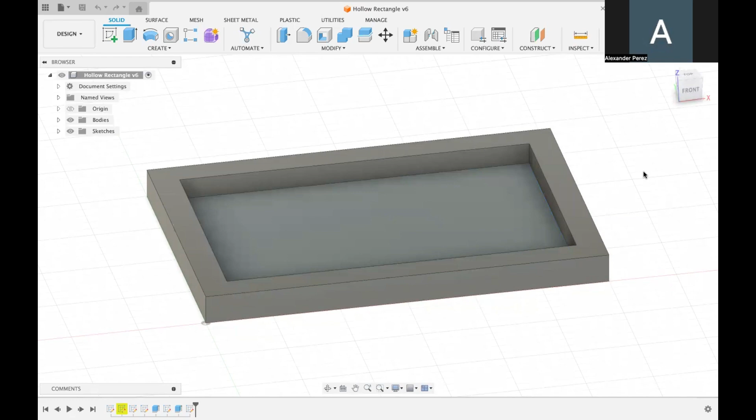Okay, and now that we are in Fusion360, I'm obviously not going to be teaching you how to make a CAD model. However, I hope you have a coherent file that you can use to follow along with this tutorial. In my case, I already have a pre-made model that is relatively simple. It's just a hollowed out epoxy rectangle, which I will be using the CAM software to set the toolpath to mill out all of this stock.

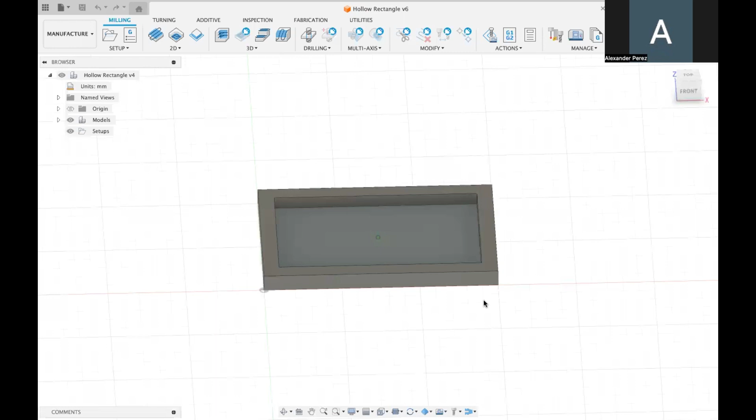So now we can switch over to the CAM section of Fusion360, where essentially we're going to be setting the instructions for the machine, as well as the direction of the material on the bed of the machine, and the direction of the end mill.

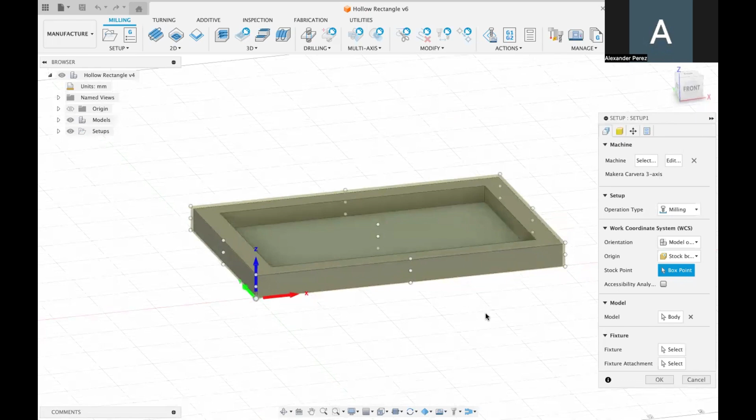So first, we're going to be going to the setup, as obviously we can't have a G-code without setting up some sort of base for things such as the tool orientation origin, where we're going to be telling the machine where the X, Y, and Z of our stock is. You can put this on the top left or bottom left of your stock. I preferably like to do it on the bottom left. I just think it looks cleaner, but it's all up to your preference.

And as for the machine, if you're using the carbide, you're going to just select no machine, and later in the exporting process, there will be special settings for that. But if you are using the Carvera machine, you will just select the Carvera after importing the files from the Makera website onto your computer. And as for the WCS, we just sort of leave that as is. The stock should be relatively the same, and all of that should be left as is.

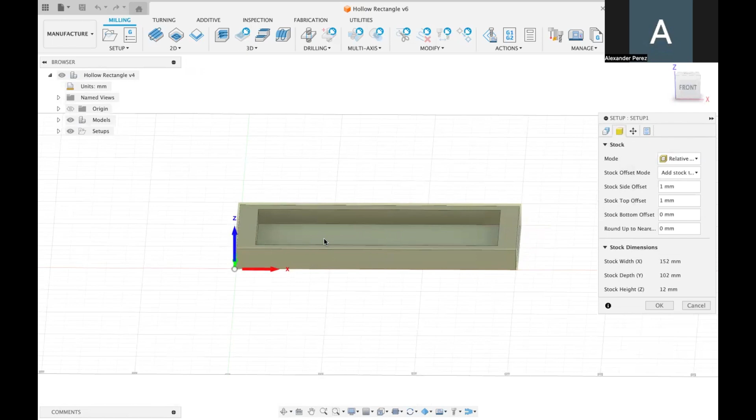For the stock, this is really depending on your CAD. In my scenario, the model I have is already set to the exact size of the stock I have in real life that came with the Carvera machine. So we can just set this to 0. However, if you are going to be using a CAD model that isn't set to the exact size of your stock, which typically it isn't, you're going to want to do fixed size box in these settings here, and then set the X, Y, and Z to the exact diameter of your stock. But yeah, like I said, in my scenario, we're just going to be setting that to 0.

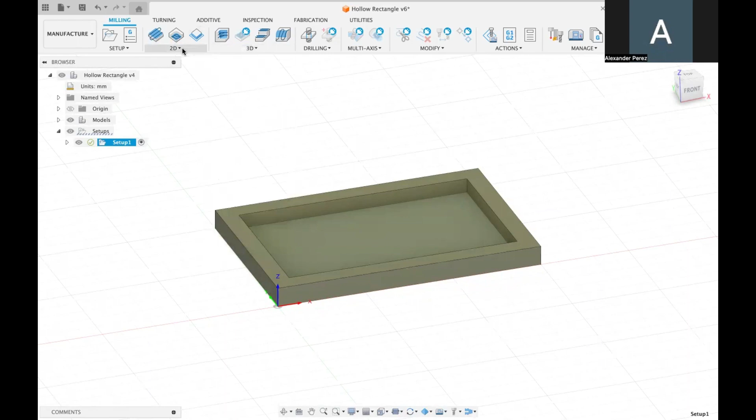And as for the part position and post process, you can leave this as is. It really isn't worth the trouble to mess with it, and it's all stuff that is very finicky and very situational. So now that we're done with our setup, we can move on to the actual toolpath. And as you can see here, there's a 2D and 3D option. In this case, we're going to be doing the 3D.

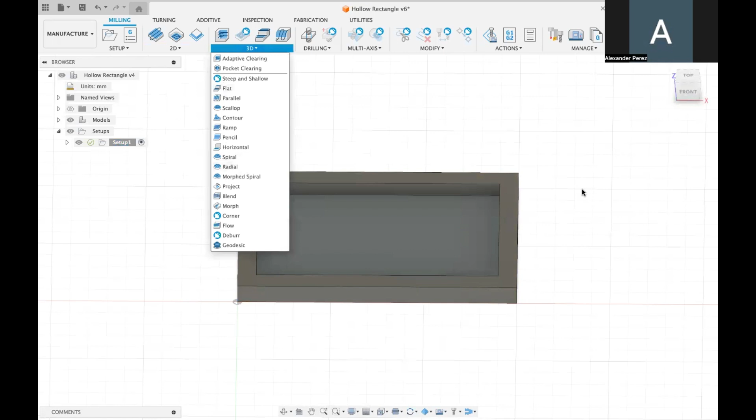However, the 2D is also very useful in a lot of other projects where there are different niche presets such as threading, engraving, and slotting. So very useful things, but we're not going to be using that today. Here in the 3D tab, you can see there are a lot of preset toolpath settings, such as contouring, spiral, radial, different things that utilize the 3-axis machining. So very useful if you are going to be doing different organic surfaces, such as curves.

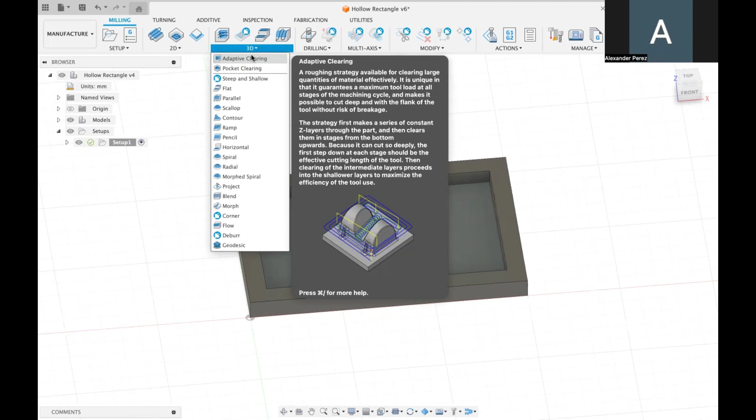But in this case, we're just going to be doing pocket clearing, as we're going to be focusing on just removing large amounts of stock without having too many different movements. Adaptive clearing is also very relevant, but pocket clearing is typically used more for just removing stock, while adaptive clearing is used for removing stock while also having different obstacles in its way. So just sort of a more complex version of pocket clearing.

And now that we've selected that, we have all of these different fun terms here. While it may look complicated, most of these things for the feeds and speeds, you can look up online. I will have a link in the description of this video showing different presets for the feeds and speeds based on the tool bits you're using, as well as the stock material.

So all those things can have a factor in the efficiency of your toolpath. Doing the right feeds and speeds can help you create a more perfected toolpath. However, most of the preset feeds and speeds will be pretty efficient, and you will not have to mess with them too much.

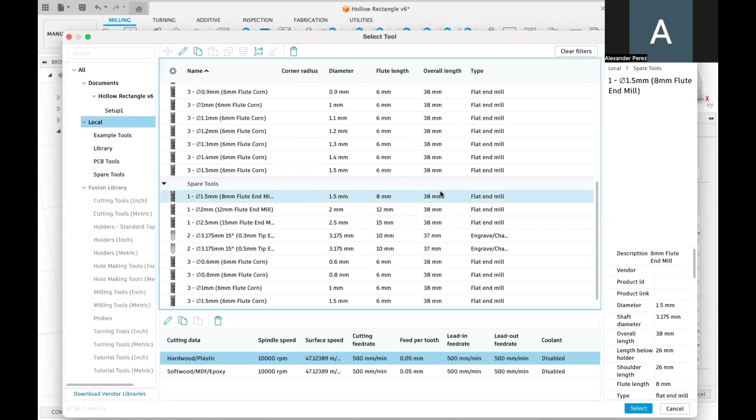As for the tool we're going to use, this is very situational, and I will have a separate video explaining all of the different end mills and what they do and when you should use them. In this scenario, I imported the tool files from the Makera website, which I will link in the description. I'm just going to be using a 1.5 millimeter diameter, 8 millimeter flute, flat end mill. So we can select that and put that in here.

Now that is there, we can have the preset for our stock material. In this case, like I said, I'm using epoxy, but if you're using a hardwood or a plastic or a different material, you can set those accordingly.

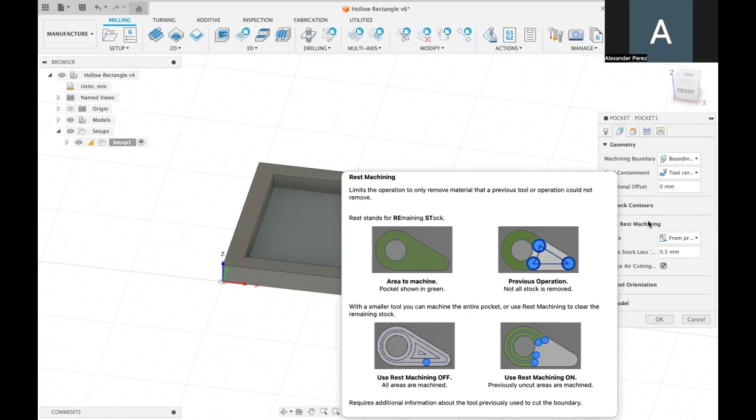Now that we've selected that, we can move on to geometry, which is pretty simple. Rest machining is essentially going to be setting the area of the stock that wasn't previously machined by another operation. So if you have more than one operation, you should be using rest machining. But if it is just going to be one big operation such as this one, you can just set it as off.

And for the bounding, the machining boundary, it should be set to bounding box. And if it's not, please select that.

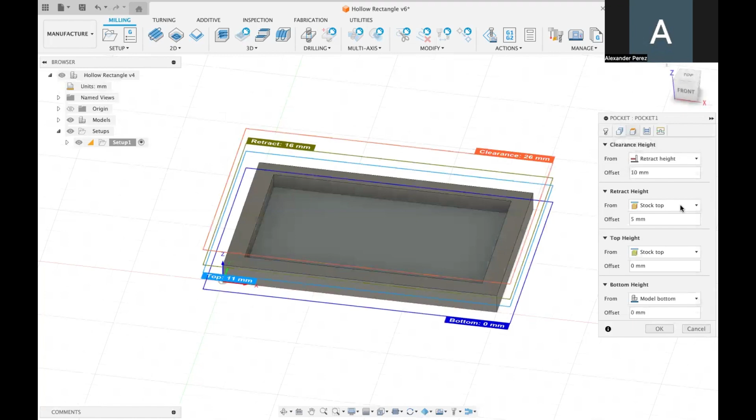As for the heights, this is essentially where the spindle goes to every single time it goes up. And here we have our heights where we can see there's the clearance, retract, top, and bottom heights.

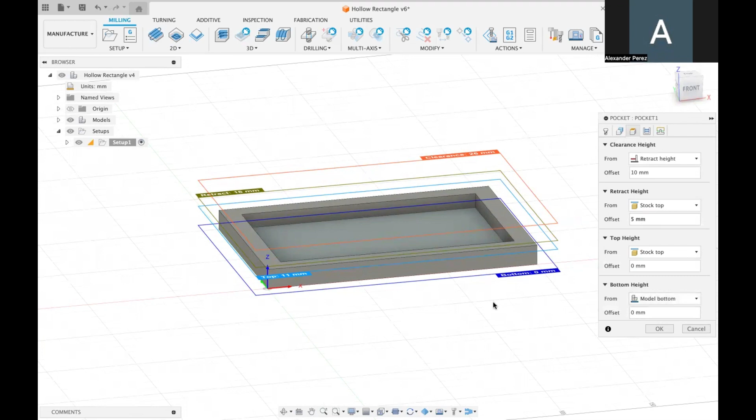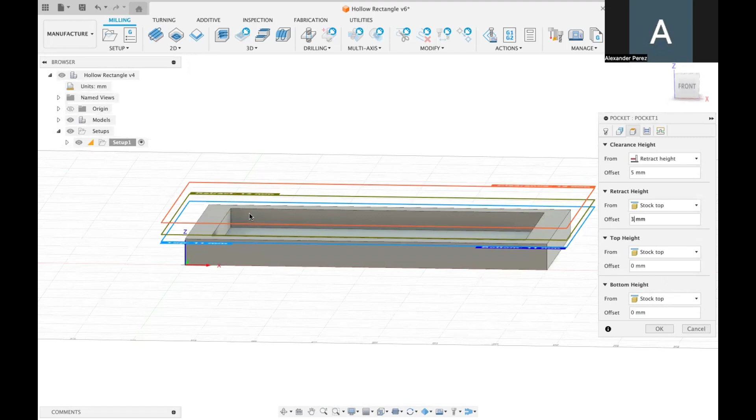The top and bottom heights should just be set to stock top and bottom, while the retract and clearance heights are very specific. If you're going to be using a stock that has different lengths up and down, you should set the retract to a lot higher than the top of your stock. In this scenario, it's just going to be one flat length, so we can set this to a smaller clearance and retract. However, if you are going to be having different size stock, you should set your retract higher, just as sort of a safety precaution.

Now for passes, this is also a very important tab that can affect the way your toolpath is generated very heavily. The tolerance is a very, very important setting.

And as for all of these settings, these are pretty self-explanatory. If you look at the preview, they're also kind of irrelevant, so we can just sort of ignore those.

For the direction, in this case, we're just going to be climbing down the stock here, so we can just leave that as conventional or both ways. It really does not have too much of an impact. If you are going to be doing a more complex toolpath, I would suggest doing both ways, but really not that important unless it is a situation that requires it.

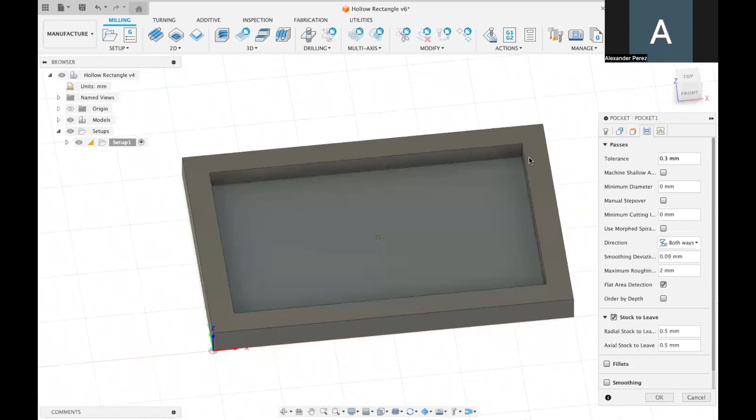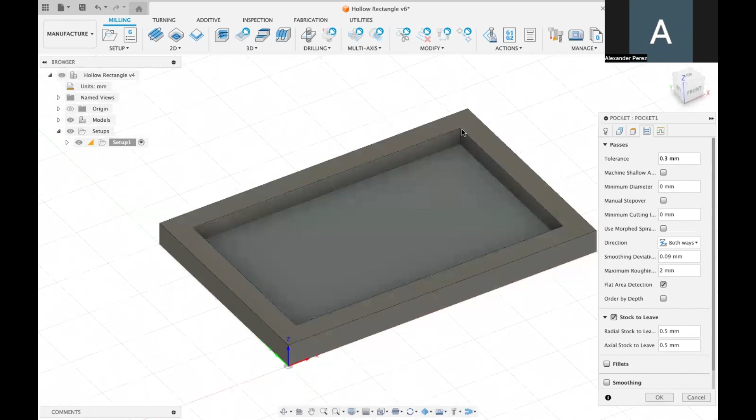For the smoothing deviation, this is essentially how much your corners are going to be avoided. Because we're also using a circular bit or end mill, the corners will have a little bit of stock left on them, and that is called a fillet. If you so choose, if you're doing a project such as this, you're most likely going to want a separate toolpath with a smaller end mill, or an end mill with a smaller diameter, just so it can clear more of the fillet and have a more accurate angle there. But in this case, we can just leave that at 0.1 as it is not that relevant here.

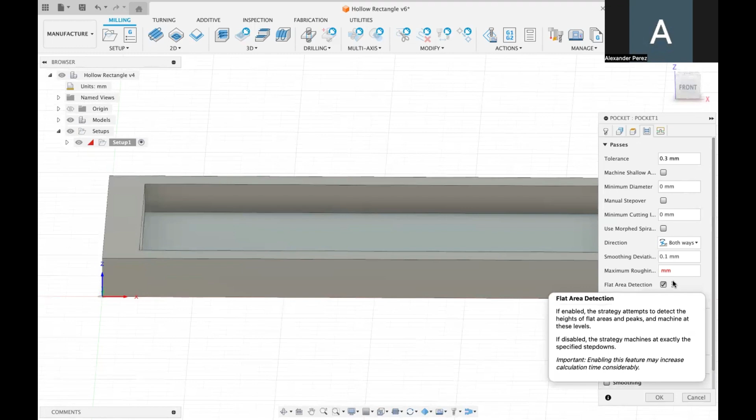For the roughing step down, or the DOC, the depth of cut can really be set to anywhere near 1 to 3, depending on the diameter and length of your bit, as well as the material. If you're doing a very dense material such as metal, you're going to want most likely a smaller step down, as there's going to be more strain on your bit.

Also, just a good token of advice: even if you feel pretty confident that a material like epoxy is softer, so you think because it's softer and you're using a larger bit, you can have a 4mm step down - that's still kind of risky and can put a lot of strain on the bit. It's also important to note that you don't know how much a bit has been used or how old it is.

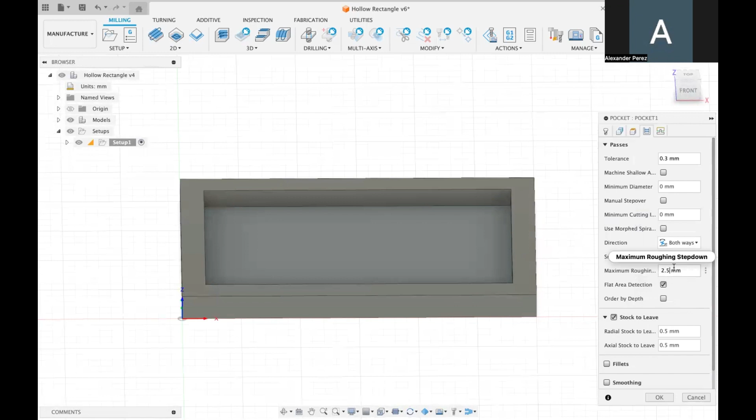So generally just being patient and doing anywhere from a 2 to 2.5 step down, I would recommend when clearing mass amounts of stock. But if you are using a much larger bit, this can be set a little higher. As for the stock to leave, this can just be left as is, because our stock is literally set to the size of this box. We can just turn this off and ignore that, and that is the setup.

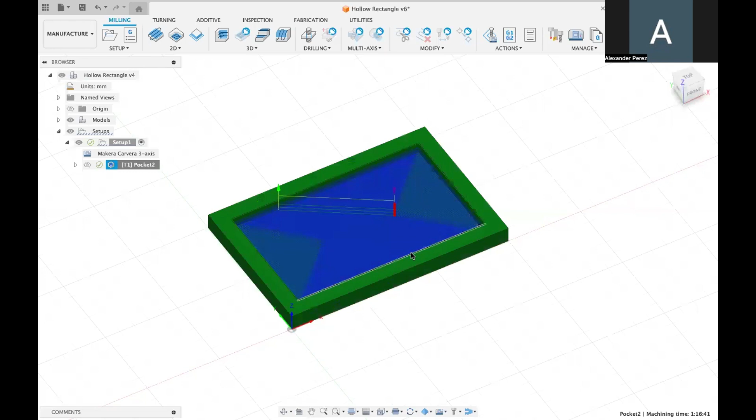Here we have our finished toolpath. As you can see, it's pretty simple, as we're literally just going back and forth clearing out large amounts of stock. In relation, we have our machining time here in the corner - an hour 16 is pretty normal, as we're clearing out a large amount of stock while also being careful and knowledgeable about the restrictions of our bit and the feeds and speeds. I'd say that's pretty good.

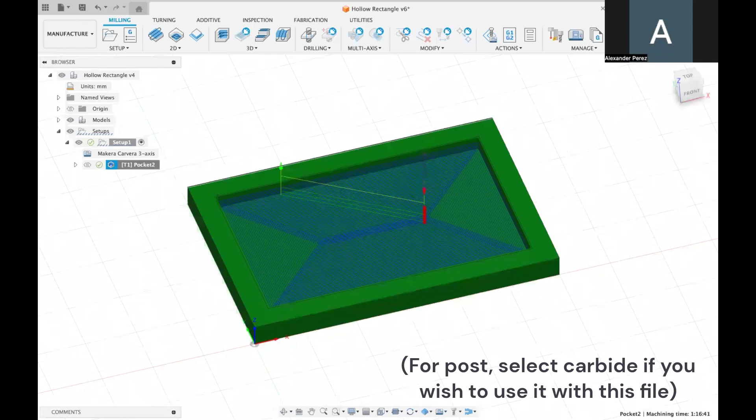But now that you're done having your toolpath made, you can come here and right click, or go to the Actions tab and go to Post Process. Here is where you can name your file, so here we can just name it load out epoxy rectangle.

Now that that's set, and we have our post processing up here, we can make sure everything else is fine. We have our units here in millimeters - that's very important. If you made your model in inches, obviously set that to inches. But in my case, we did it in millimeters, so that's the option I clicked.

If you wish, you can post it to the Fusion team, but it's really up to you. Then you can post it, and that should be relatively it. Now, once you go to your desktop, you can search for it and move it to your desktop, just so it's a little easier to find and you don't have to search through your files.

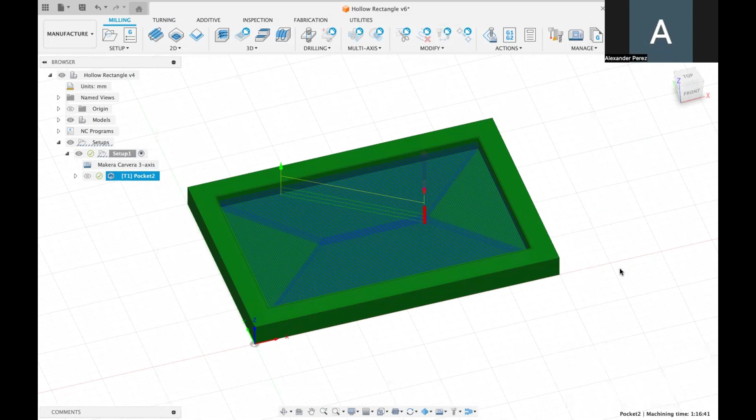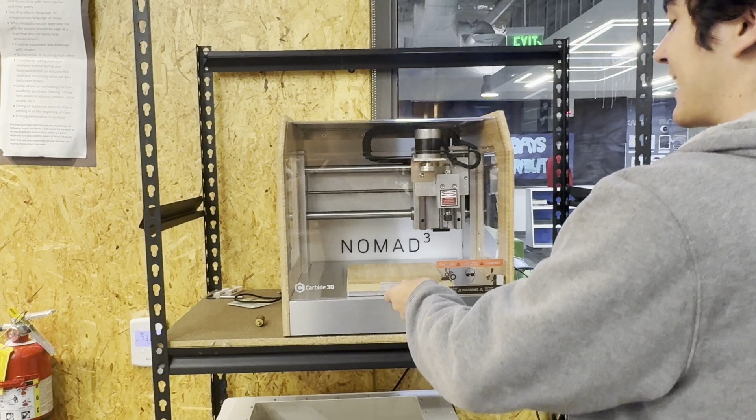All right, now on to calibration. For the Nomad machine, this one is a lot more traditional and less technologically advanced than the Carvera machine. However, it still works just as well.

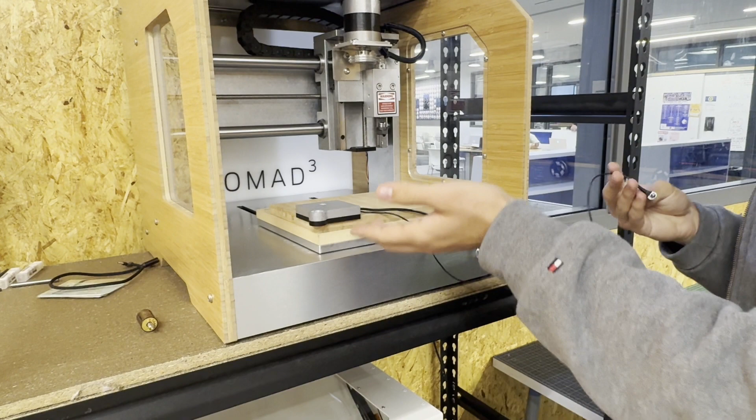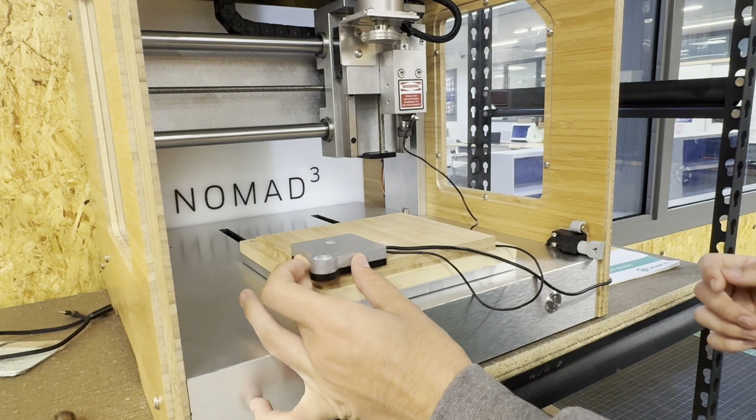With the door being open during the calibration process for the Carbide Nomad, we're going to need the bypass key so that the machine allows you to jog the spindle without it stopping. Here is the auto Z-probing device for the Carbide, and essentially what this does is with the metal rod placed where the bit would normally be, it goes inside the sensor and hits around to see what level things are at, so it can get the X, Y, and Z axis.

Obviously, like I said, this is a lot less technologically advanced than the Carvera. However, manually setting the X, Y, and Z does help a lot with the accuracy of your toolpaths. As opposed to this method, there's also another way to calibrate your Nomad machine, where you jog the actual bit, not the little metal rod, to the bottom left corner of your stock, then get a piece of paper and drag it until the paper is tightened, and from there you'll set your X, Y, and Z to 0, which will be set as your work origin point.

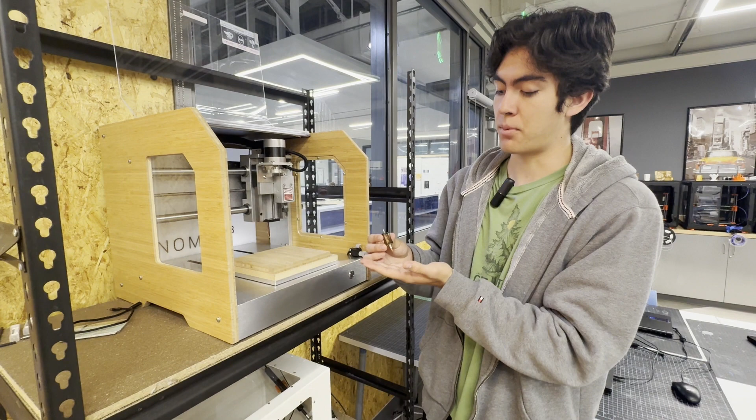Another important note is that this is the Z probe for the Carvera machine. Similar to the bits, it automatically swaps in and out, which is very convenient. Essentially, it has a little sensor with a laser on the bottom that whenever you click it down onto a surface, it'll automatically sense that something is there.

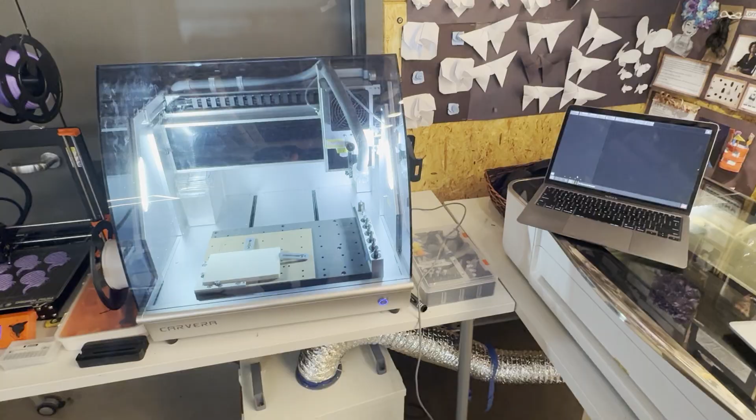So pretty cool technology from Carvera, very useful as I said, and it does speed up the calibration process a lot. Alright, so now we are going to be focusing on the controller and actual machining process.

As you can see here, I already secured my stock. This is crucial, and if you do not do this, you can really jeopardize your cuts and the safety of the operation in general.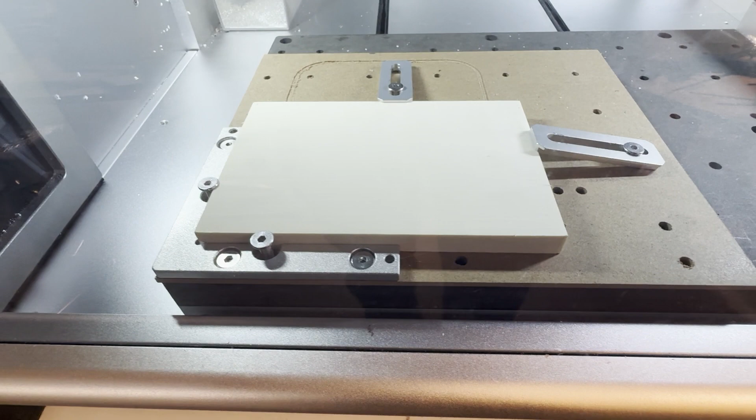Once you have your computer out and connect to the controller, I connected via Wi-Fi, but you can connect to the Carvera via USB or Wi-Fi. Once you do that, you have to upload your file. I already uploaded the file we just downloaded onto our desktop.

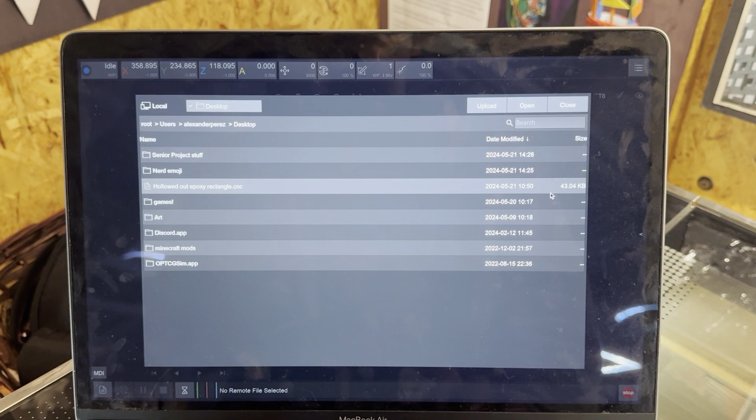However, if you go to upload file and click it here, you just do it again. Click confirm when you want to upload your file, and it should load pretty fast since this is a small file. Close it, go to your remote, and it should be at the top once you download it. Then download that onto your controller, where you can see your final toolpath, and monitor it here to see if there are any issues. Everything seems pretty efficient here, so nothing to worry about.

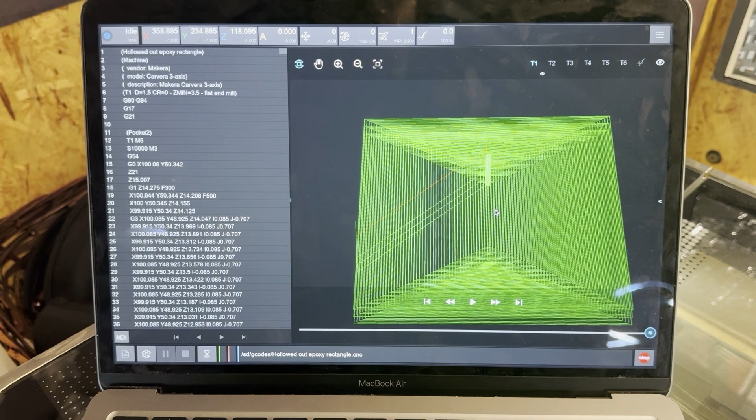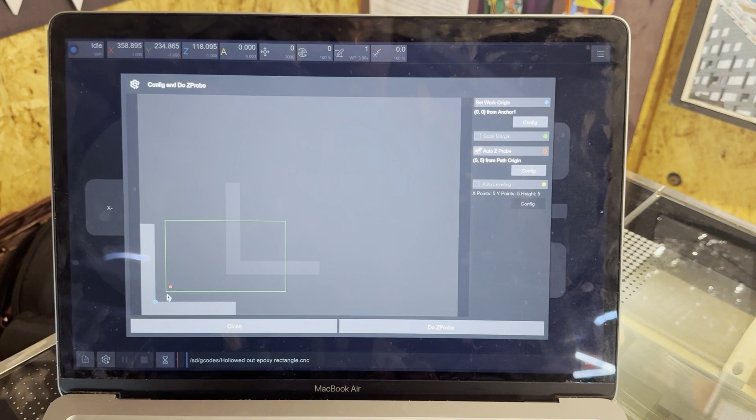As for the actual calibration process, we have a few different options here. First we're going to want to set the Z probe, and from here we can see our work origin. This is the gap between the stock and what is going to be milled inside. Our origin point, or work origin, we want to set adjacent to where our stock is, so we can just leave that at 0, 0.

As for the Z probe, we can configure this so our stock is set in the right place, so that's pretty good. If you want, you can do the auto Z probe, but once you start the milling operation, it'll do it automatically anyway. Then next you want to look at the auto leveling.

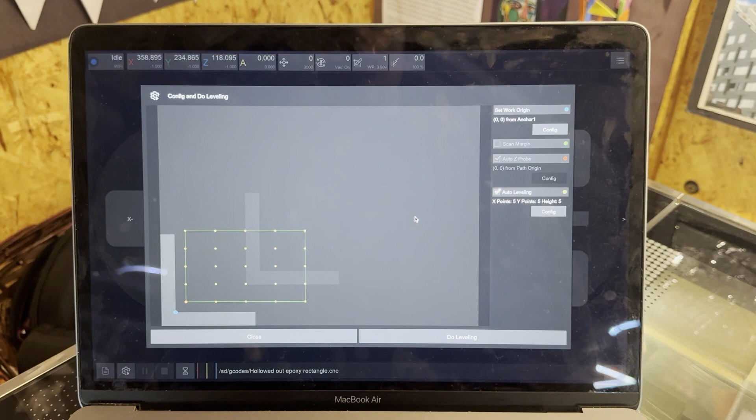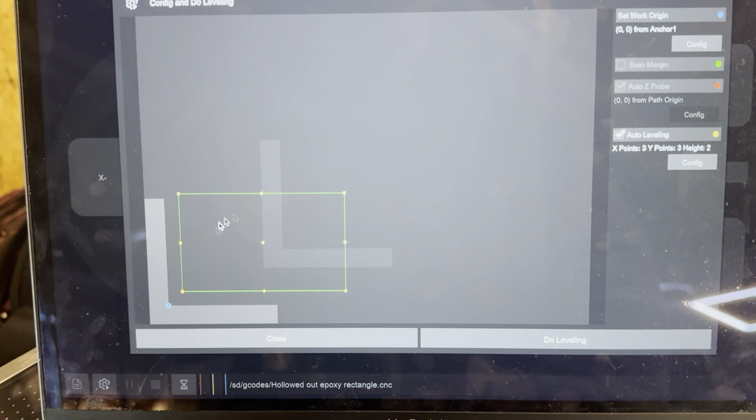This is essentially going to press down the Z probe so it can level the stock and the spindle automatically. This is way too many points to press down on, and it's going to take way too long, so we're going to lower that to 3 points and 3 points each, then press OK. Here you can see we have a much simpler path. If you want, you can even set one of them to 5 for more accuracy, but I think it's fine like this.

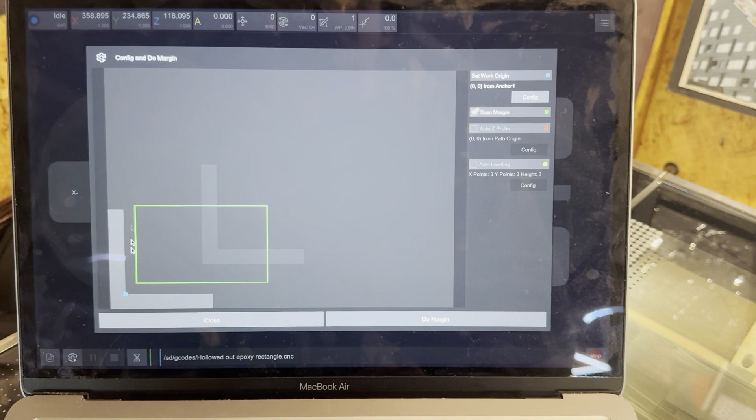Then finally, we want to do our margin. This is already fine, since, like I said, we're starting from 0, 0, so nothing really to worry about here. But if your stock is not in the bottom left corner, you do want to offset that accordingly.

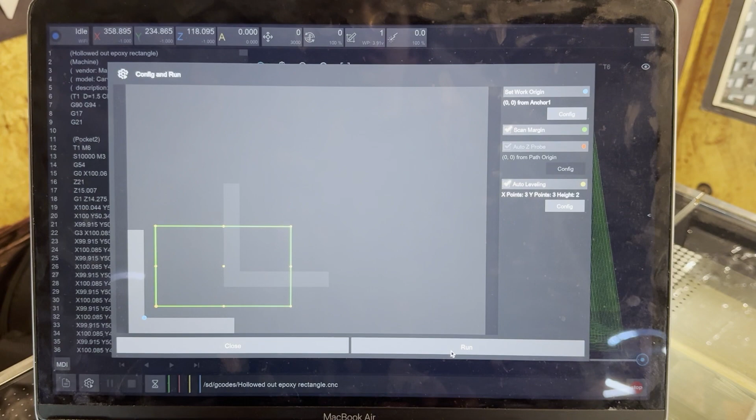Once you're done with all of those options, you can finally click Config and Run. Here we can see all of our options. You're going to want to turn on auto Z probe and auto leveling. So now once all of our settings are here, you can click run and finally start the machine.

As you can see here, it's going to drop the bit that I already put in for this operation back into its first slot, and then it's going to grab the Z probe. I'm not going to show this entire process. However, once you get to this stage, you're going to want to simply watch the milling operation and see any signs that there may be strain or chances of an error during the print.